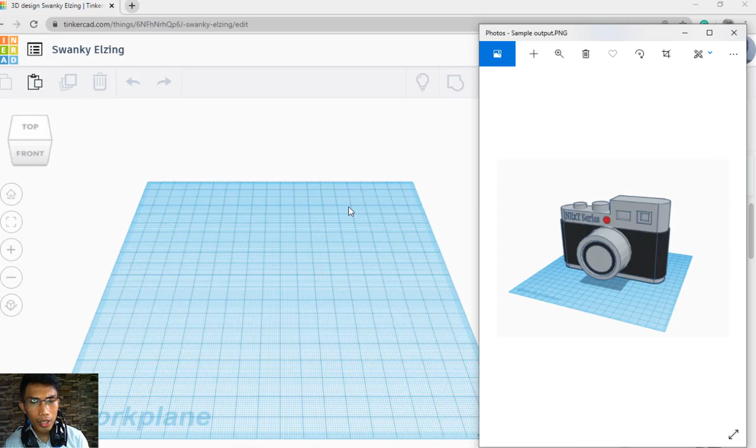I actually made this design yesterday night. This is a camera, a 3D camera, made using the Tinkercad application. So here is the Tinkercad environment, and as you can see, it's a very easy and simple environment.

On the upper left corner of my screen, you can see the file name of your Tinkercad design. We can change that by simply double clicking and retyping our file name. For example, this is our first 3D design, and then you just press enter. Now you can see the file name has changed to first 3D design.

The next thing to do is to familiarize ourselves with the environment of Tinkercad. You can see here that you can duplicate or copy your Tinkercad design. You can paste, duplicate, delete, and redo or undo your designs.

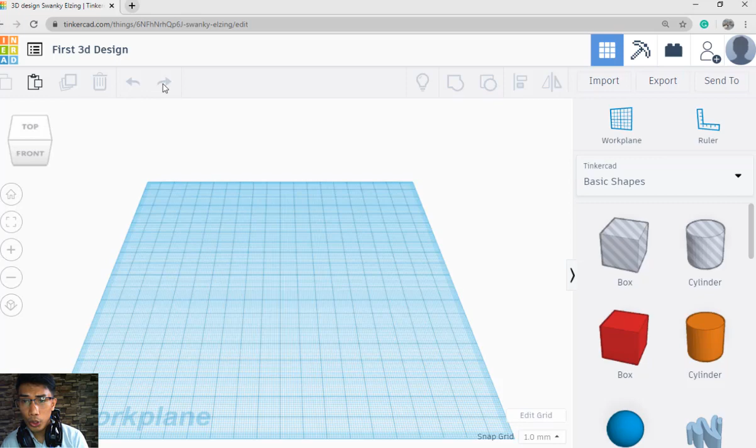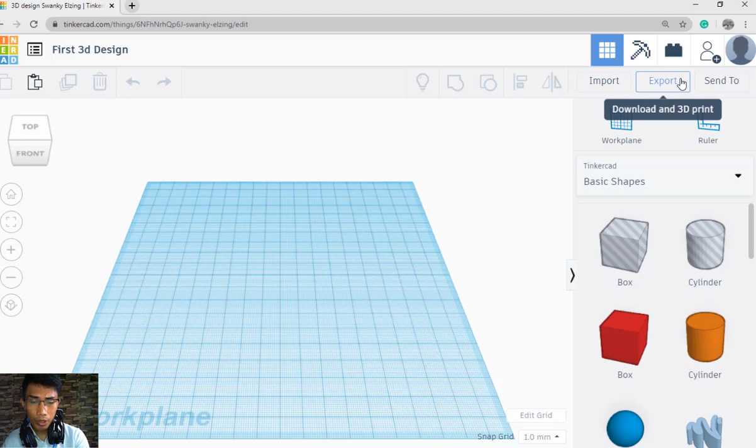Also here are the disabled function icons. You'll see the different functions of these icons once we're doing the actual 3D modeling design. You can also import from your local computer, and export the file you're doing here in Tinkercad, so later you can 3D print it. I'll show you how to export and the different file extension names you can use.

For collaboration, you can add your learners, classmates, or teammates later on, and you can also send your design to other people.

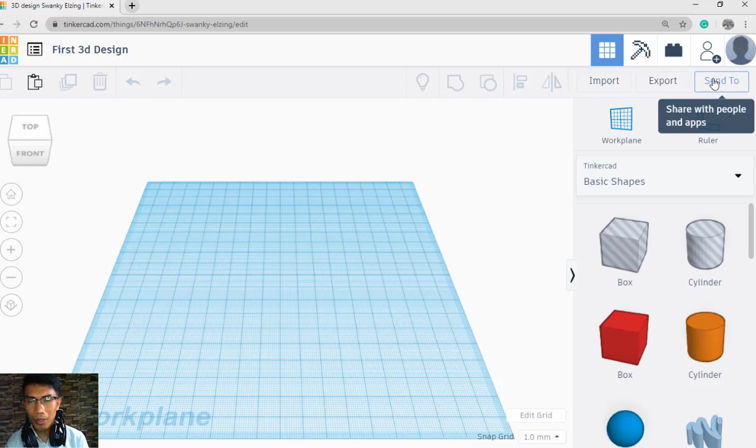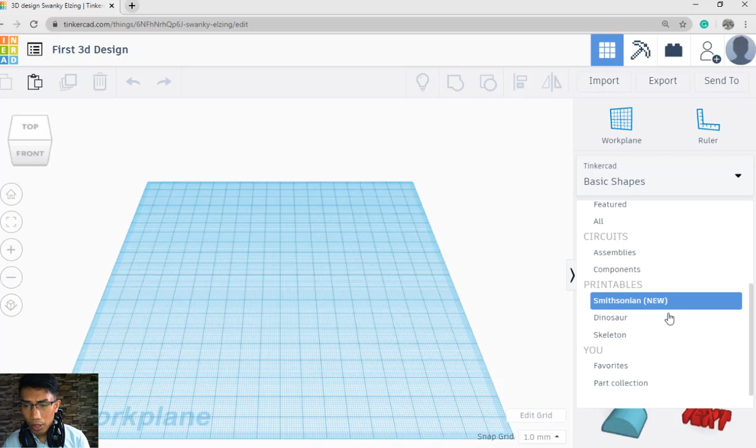Here are the actual shapes available in Tinkercad. These are just the basic shapes. You can choose from different shapes: text and numbers, characters, connectors, helpers, and a lot more. It's up to you to navigate later on, but let's just use the basic shapes available in Tinkercad.

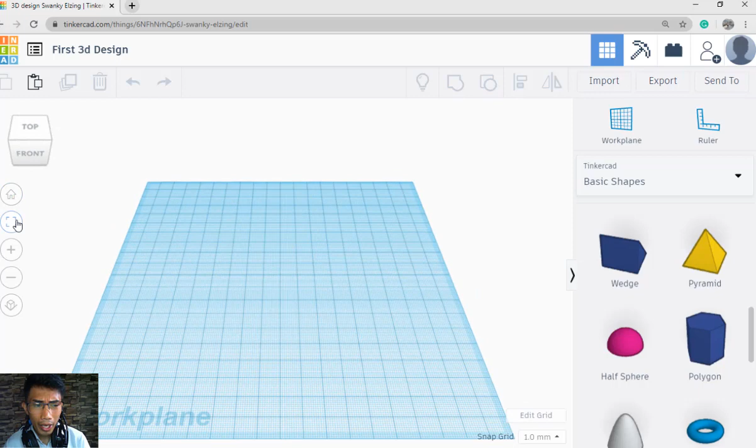On my left screen, we have the navigation icon. I'm holding my right click in my mouse, and you can see my work plane is moving. This is how you navigate your Tinkercad design, using the home, recenter, zoom in and zoom out, and the switch to perspective view options.

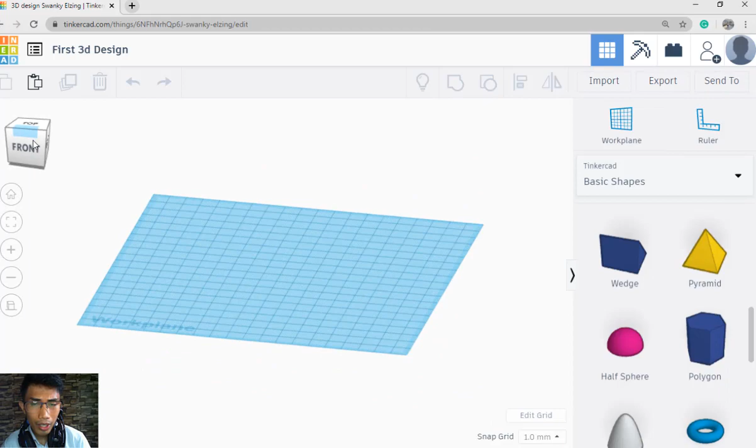Moving on, let's now create a basic 3D model. We're going to create a basic camera, a 3D model of a camera like this digital camera here. You can use this icon to navigate the 3D object, or use the right click of your mouse to navigate. Now I think we're ready to design our 3D camera.

First, let's check our camera. As you can see, it has a shape, I think a square shape, so we need to add a box. You simply select the box, or the 3D object you want, and put it in your work plane, then drop it. So this is our box, and the next thing to do is resize it.

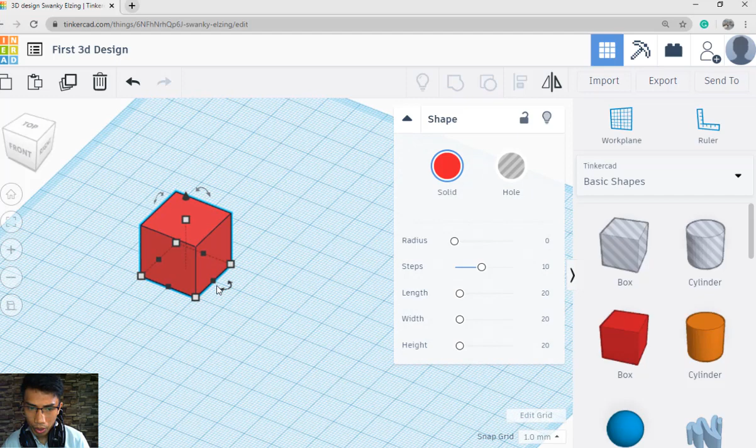We have options on how to resize our 3D design. The manual way is to select the point and then drag, push or pull it, as you can see on my screen. We also have the option to type the exact size — for example, this one is 20, I can change it to 25, and here let's say 75. So you can either manually resize your 3D design, or simply type your desired size.

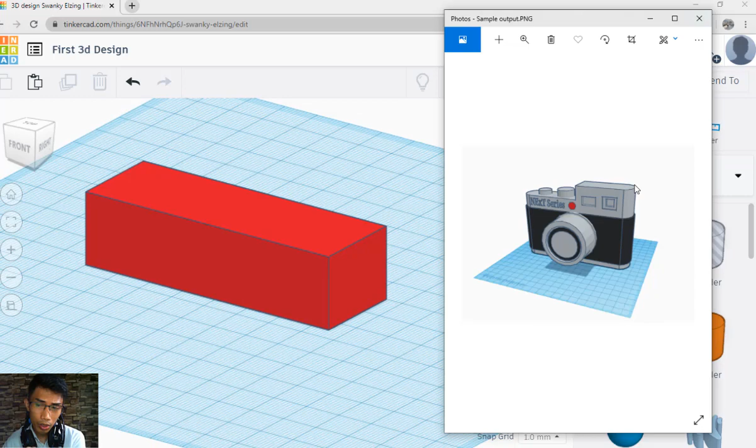Okay, going back to our design, you can see there is an actual radius here, or smooth edge. So let's try to add that. To recenter everything, by the way, you can select the 3D object and use your left click, hold it in your mouse, and then simply move your 3D design. Since there's a radius or smooth edge, maybe we can use the cylinder.

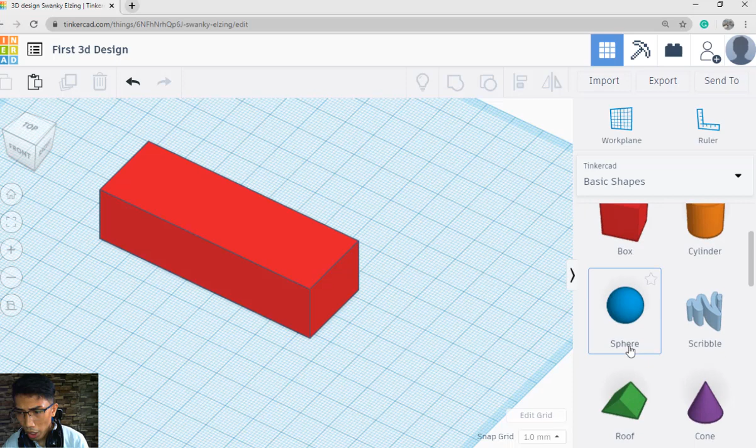This one is the cylinder, and then drop it here. There you go. Let's just make sure to follow the size of our first object, which is the box. So we can manually type it. Okay, I think this is 25. There you go. So I think we can now group the two objects.

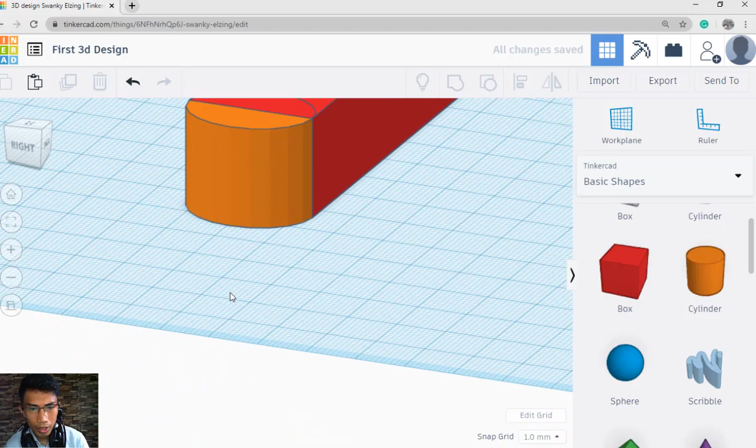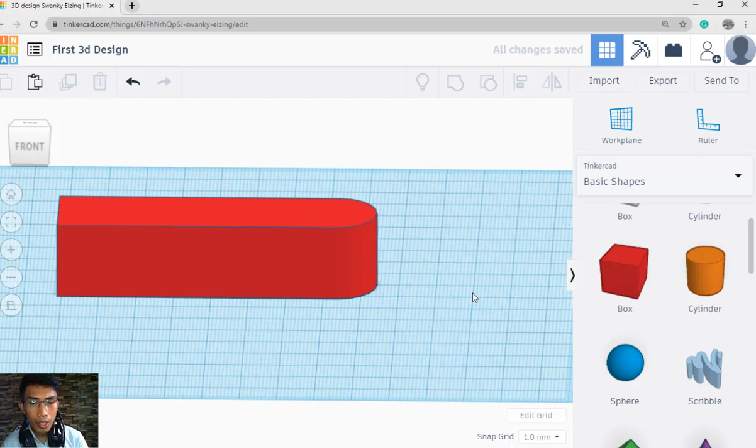On how to do that, you simply select the two objects, and then you can see here in my upper right corner the Control G. You can press Control G in your keyboard, or you simply click this icon for it to be able to group the two objects. Now, since we're able to group it, you can see that the color will change and it will become red.

Okay, so Control Z for the meantime, since we need to duplicate this cylinder, making sure that the other edge or the other part of our cube or box is similar to the right part of our box. So let's just copy.

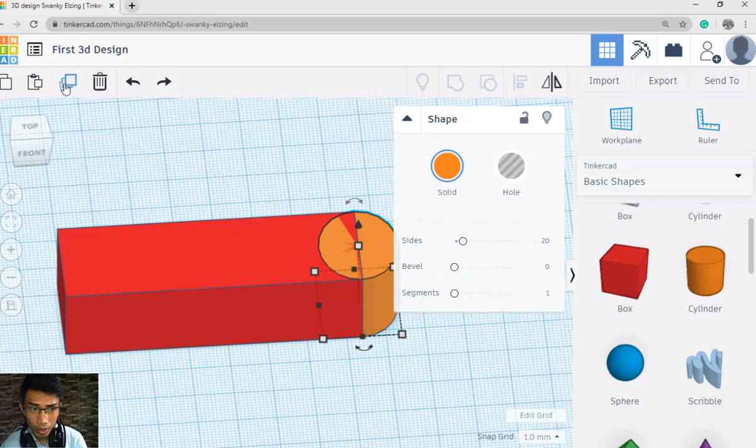Select the 3D object. You can simply duplicate it or copy paste. This one is duplicate, so you can duplicate and then just move the cylinder here. There you go, you can see now, and make sure it's proportional. All right, I think this is okay, looking good.

Now we can select the whole thing, the three 3D objects, and we can simply press Ctrl G in our keyboard to group these three 3D objects. Now you can see that I have a smooth edge in my box. So let's resize our box.

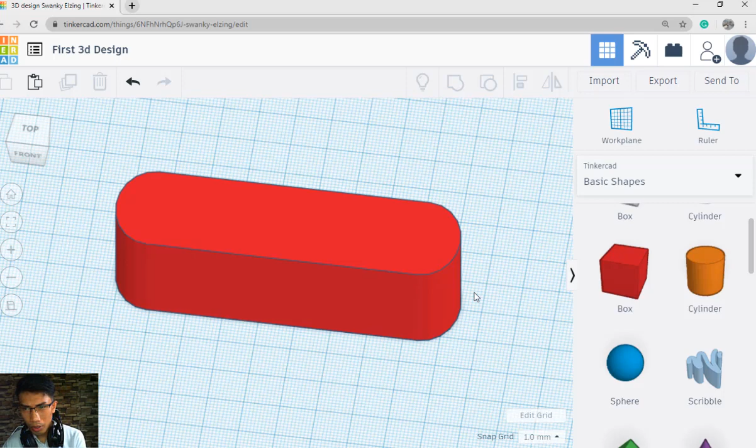Select the box, and then again you can manually resize, or you can just type the size. Maybe let's say it's 30. Okay, so that's how you combine or group 3D objects, and how you can resize using manual methods and using the exact measurement, if you want, then you simply type the value.

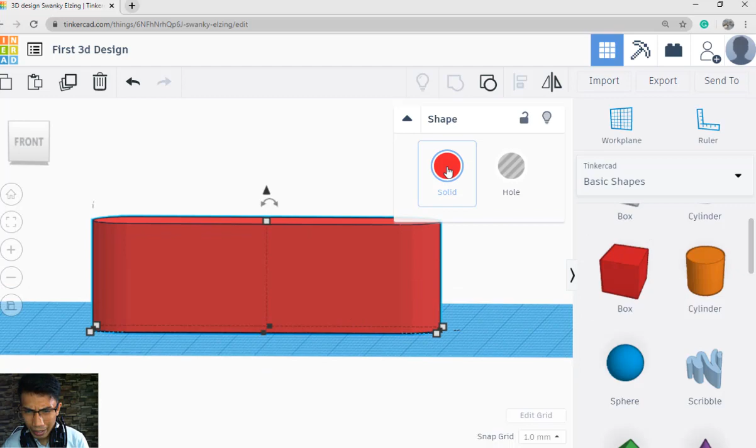Okay, going back to our camera, you can see here there's a black color here. Then let's just follow. Maybe we can duplicate this thing. Let's make sure first we need to change the color, so make it black for now. Yeah, it's black. Yeah, and then let's duplicate this 3D design.

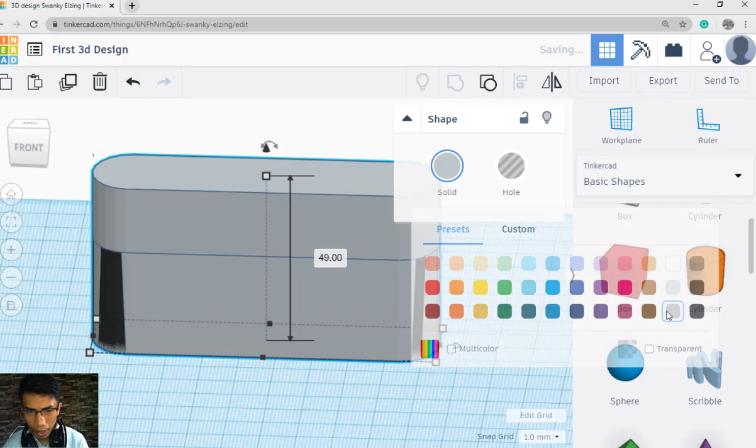So again, to duplicate, you simply press in your keyboard Control D, or use this icon, duplicate, and then resize. You can see now it's resizing, and let's change the color and make it a lighter one. Okay, and then of course you can see that it covered our first 3D object, which is the black.

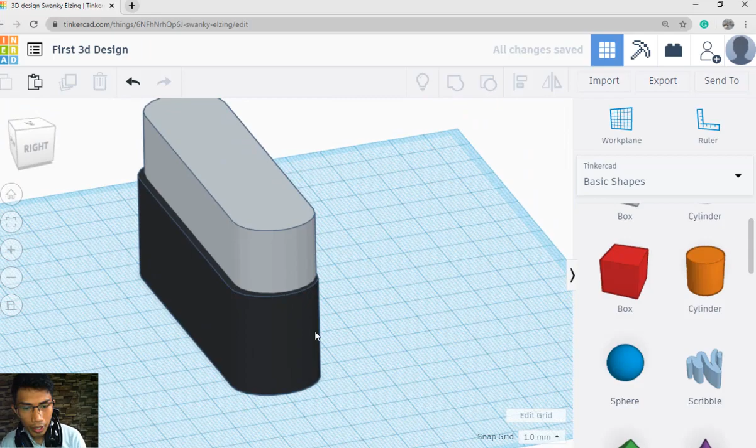So maybe we can resize this one. Select the object, and then maybe we can type 23, and then this one, maybe it's 23 also. There you go. Now you can see the design.

So we need to recenter everything. Okay, let's just check our 3D design here. There, so there's a space at the bottom. So let's move this black 3D design here just a little bit. Now I think it's okay. And then let's recenter everything, making sure that it's proportional.

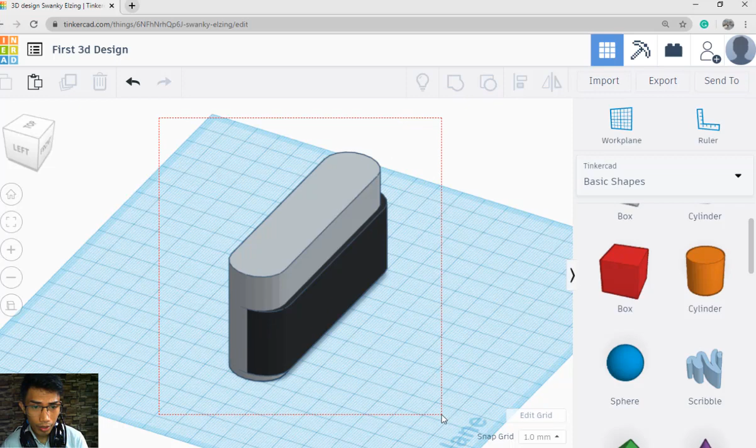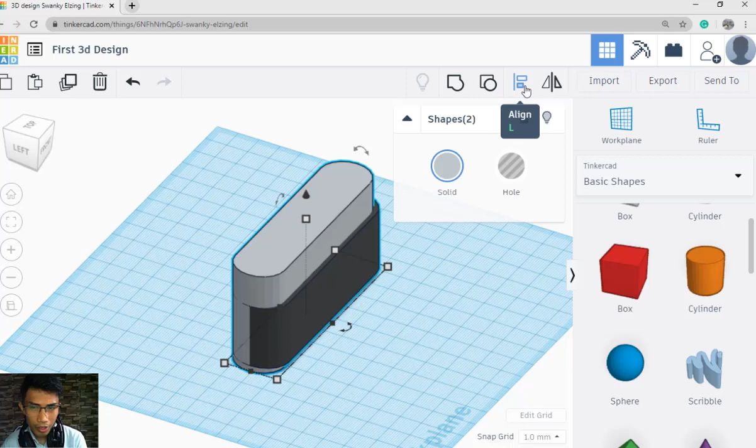Then we can select everything, box select. Okay, just like that. Or in individual selection, you simply click the first object and then hold your shift key in your keyboard and then select the other object. So once selected, you can now realign the 3D object. To do that, you can press in your keyboard the letter L, or this icon. Simply select the icon, press it, and then you can see there are several points here.

Okay, so I'm going to show you how to perfectly rearrange and then recenter everything. So I'm going to choose this center. There you go. You can see it's actually centered. And we have also here another one there. So it's actually recentered now.

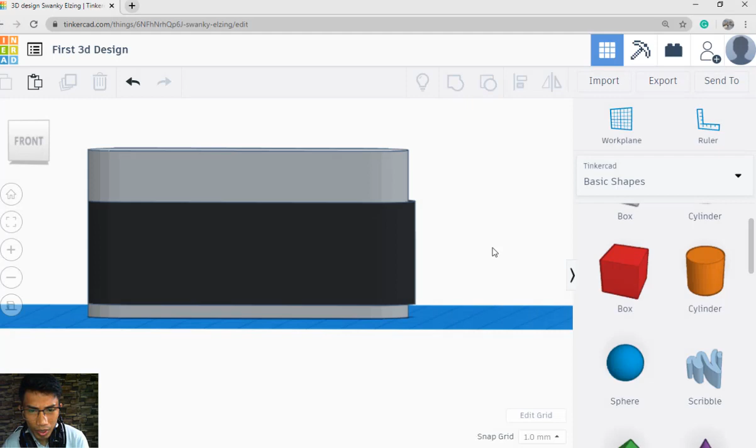Okay, and we can move now the 3D model. We can move it just a little bit down here. There you go. Let's check our sample here. Yes, so I think it's okay. And the next part is going back here. You can see, let's just resize this higher. There you go.

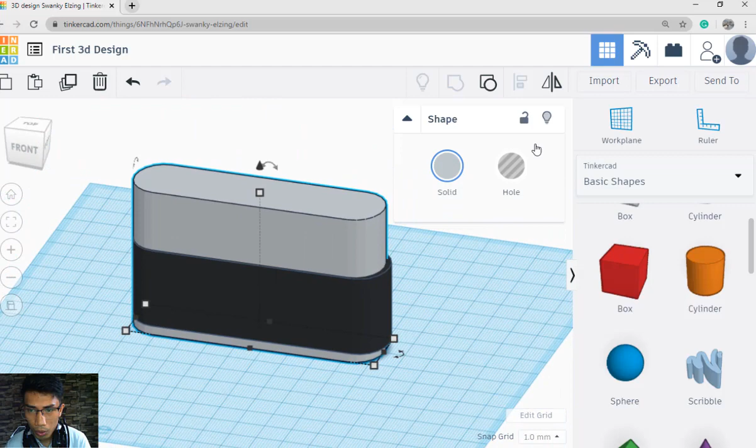I think, yeah, this is 57. And you can see here, guys, there's a cut in here. Okay, so let's just cut. So to do that, we need to add another 3D object, which is the box.

Resize it, and then we can manually resize it. And then let's move our 3D object at the top of our first 3D design. Moving it. Yeah, so you can see, let's move it. There you go. You can actually use your keyboard to move your 3D objects.

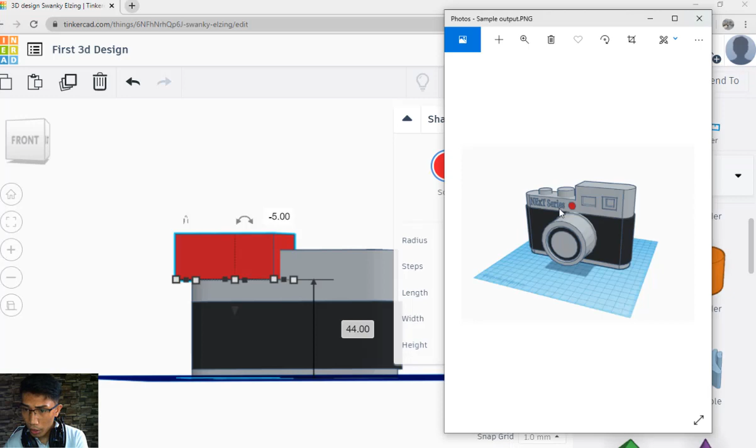Just making sure it's proportional. You can move it, lower bit. Let's check our shape here, our sample design. I think it's at the center. Okay, I think it's, yeah. So I think this is okay already. And now make sure that everything will overlap the first 3D design.

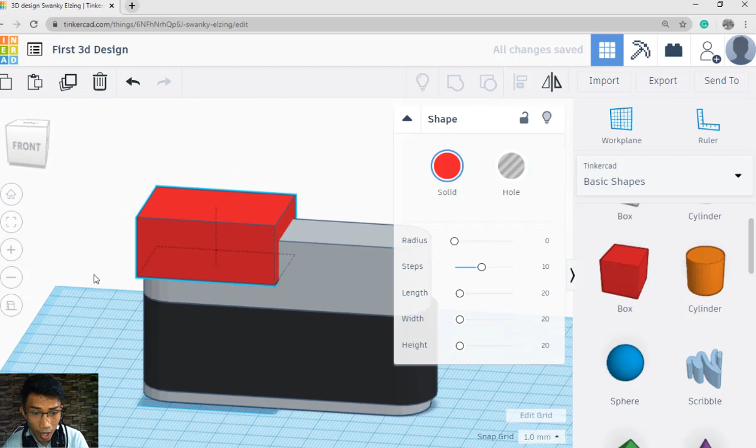There you go. And to cut the object, we need to make this 3D object a hole or transparent. So you select the 3D object and then press hole here, this one. And then you can see it's already transparent here.

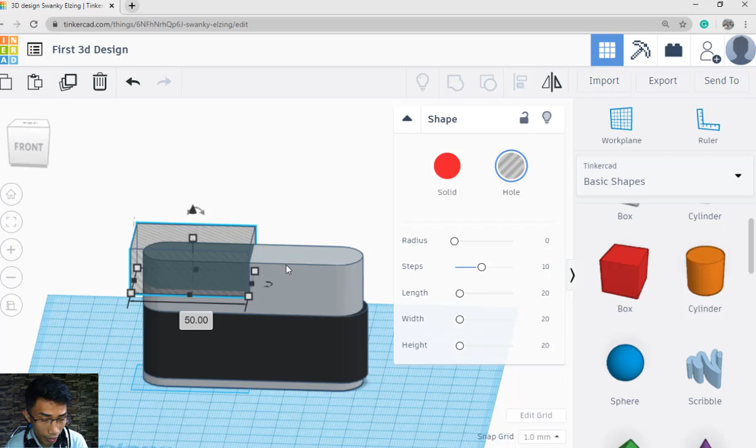Once done, you can now group the two objects. Again, select the first object, hold your shift key, and then select the next object. And then after that, we need to group. You simply press Ctrl G, or you can select the icon here. And then you can see now it's already the same with our sample camera 3D design.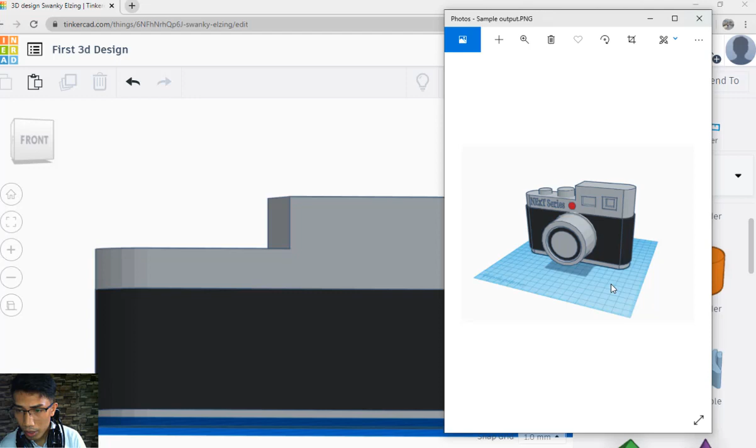Okay, so let's check our sample design here. Yeah, so it's already the same. There you go. And you can see there are two cylinders. The one is smaller, okay, so let's try to do that also.

So let's add a cylinder here. Okay, yep, so cylinder, and resize the cylinder. Okay, maybe this is like 12 by 12, this is the smaller one. And then let's make sure to recenter this. Okay, and then lower. Okay, so resized. There you go.

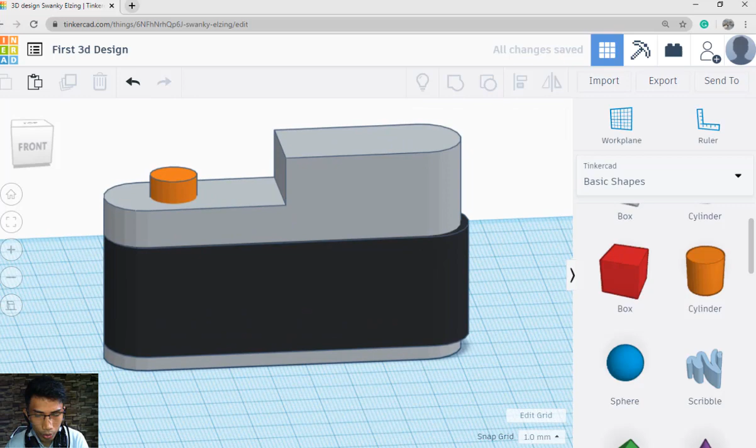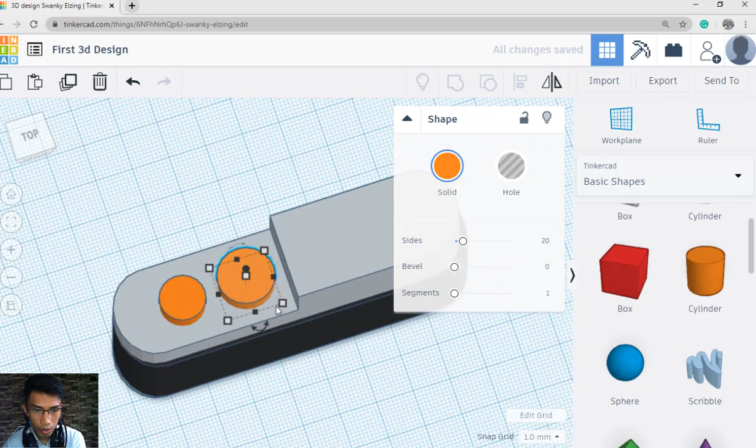We'll change the color later on. So going back to our camera sample, it's smaller, and then another cylinder here, quite bigger. So we can just duplicate the cylinder here. Okay, and then resize, so duplicate and then moved. I'm using my arrow key and then resized. Maybe this is 15 by 15. There you go. And then let's use our keyboard arrow keys.

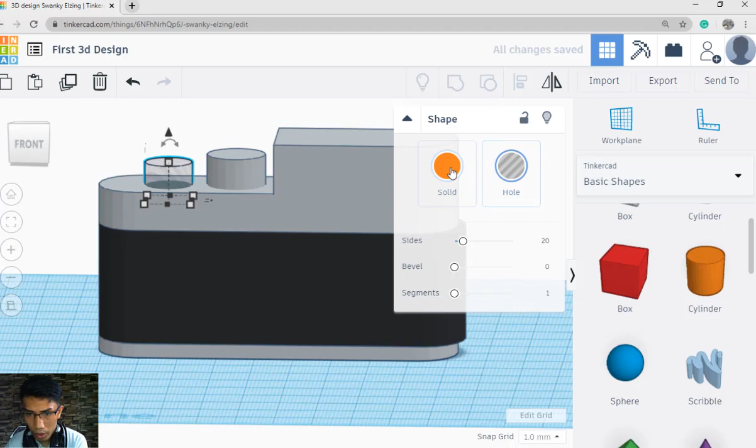There you go, so yeah, let's check. Yeah, I think it's the same already. Just a little bit higher here. There, and of course let's change the color. Select the 3D object and then change the color. Also this one, sorry, there you go. So I think we have the first part of the body of our 3D camera here.

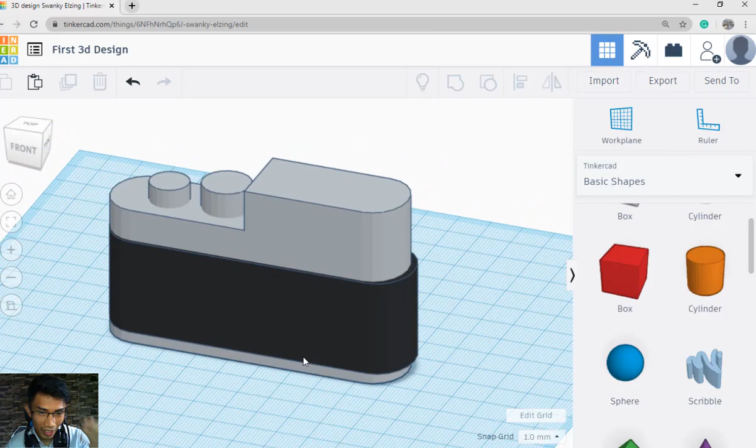And the next thing to do is, of course, we have the red thing here. Okay, that's the signal that the camera is recording, whatever. Yeah, so let's try to add the red thing there. So another cylinder, just simply drag and drop, resized. Maybe that is 7 by 7. Yep, and then resize this one, manually resize it.

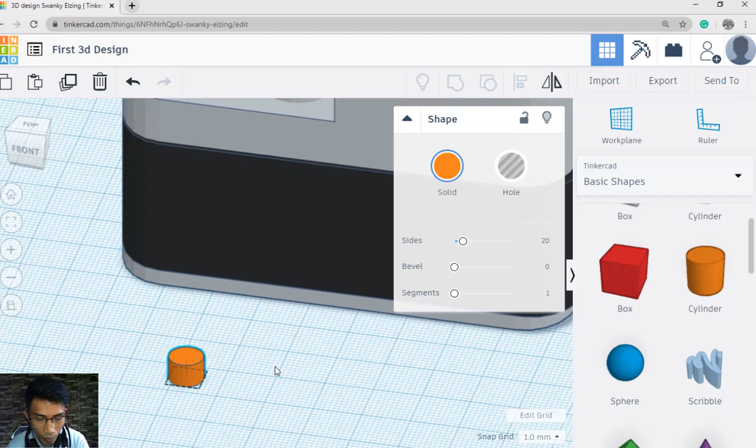And now let's try to rotate. We need to rotate the 3D object. You can see here, okay, so we can rotate it manually, or we can simply type the value. I think this is 90 degrees, so you simply select and then type 90 degrees. There you go. So change the color and make it red.

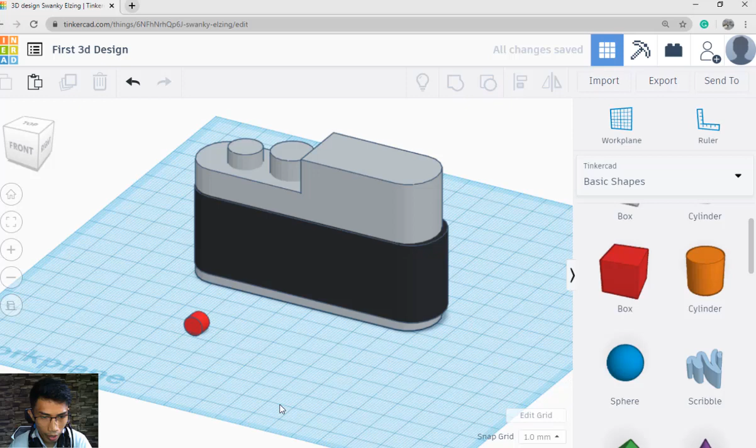Okay, yep, so there, and then let's try to move it, making sure that it's at the center of our 3D model. Okay, and then moved a little bit lower. Okay, there you go. Yeah, I think it's pretty much the same already. Yeah, I think we need to resize it also. So let's just resize, make it like 5. Also this thing here, it should be 5. There, so now it's proportion.

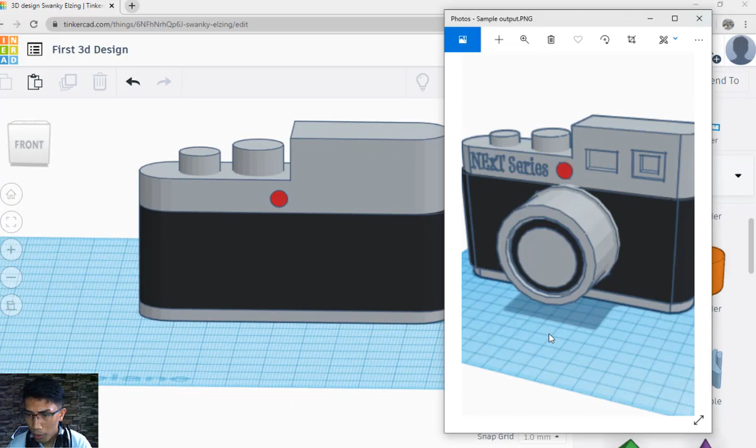Okay, the next thing to do is we have here the cylinder also here. So we can add another cylinder. Simply select cylinder here and drop, and then resize, manually resize, or you can simply type the value. So maybe that is like around 50 by 50. Yep, I think it's 50 by 50. Yeah, sure, we can just go back to the size later on.

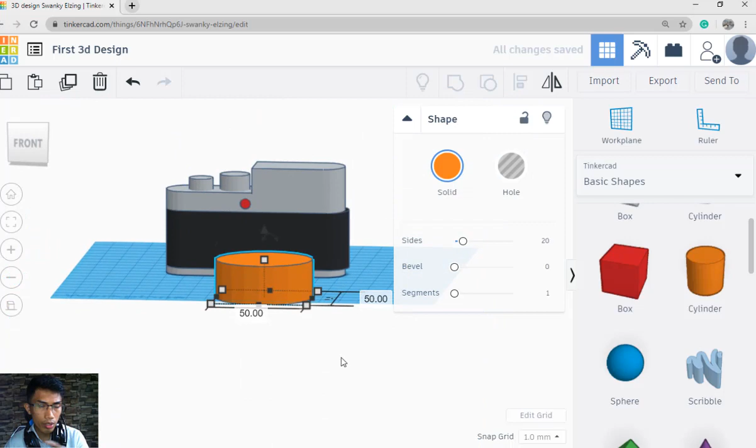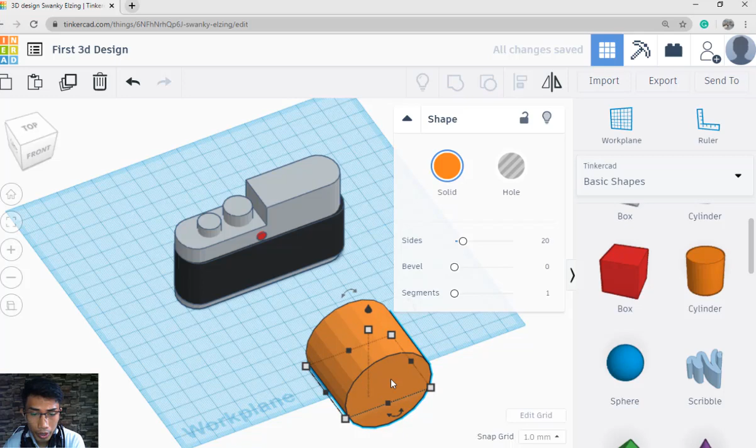Okay, and then of course let's rotate. Here we need to select this one and then type 90 degrees. There you go. And of course, resize one more thing here. Okay, all right, I think this is quite good. And of course, let's move this using our keyboard key. Okay, arrow key, and then there, and then recenter. There, I think it's quite big, so maybe we can resize this. Maybe we can make it like around 35 by 35.

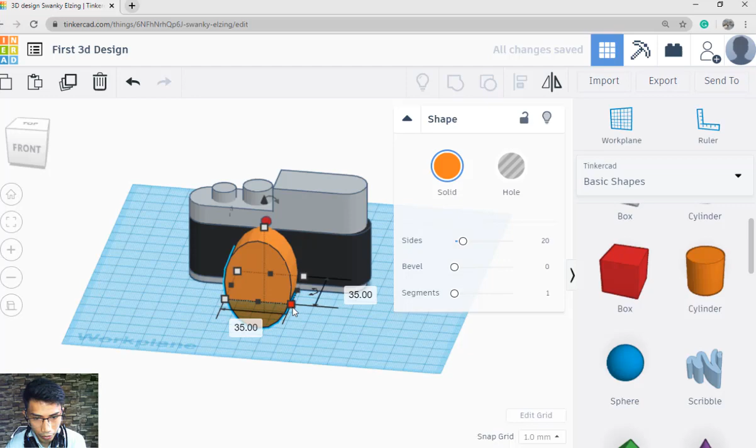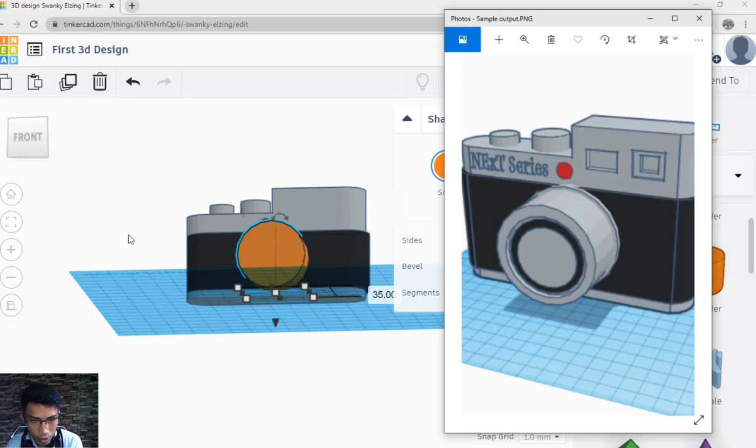35 by 35, the height should be 35 also. So let's move our cylinder here. Yep, okay, a little bit more, higher. There, so let's check our sample. I think it's perfect already. So let's just maybe change the color of this.

Okay, there you go, so we have this lens already here. Going back to our 3D design, you can see there's a black cylinder around here, a black circle here, so let's try to create that one. But you can see also here there's a bigger shape, a bigger cylinder here, so maybe we can just duplicate this thing.

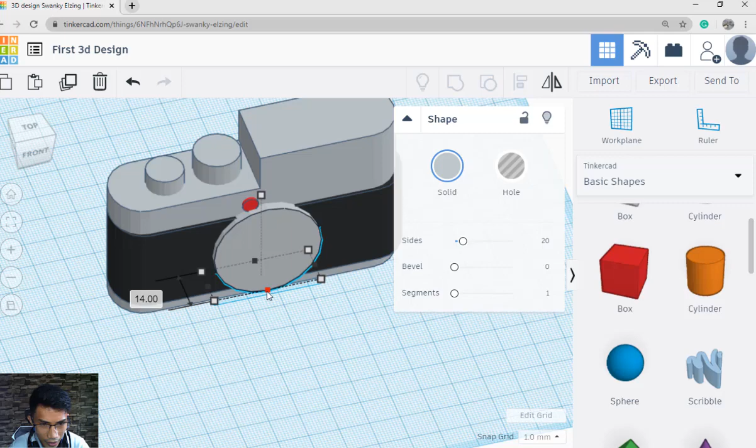Okay, resized, there you go, and duplicate, yep, and then resized. And then let's change the measurement, maybe we can make this 33. Of course, let's make the height 33 also, okay, making sure this is proportion, this one should be 33 also. There, so let's recenter this.

Okay, we can manually adjust it, or you can simply use the alignment tool later on. Okay, so I think this is okay already. And the next part is we have the black circle here. So again, one more, okay, duplicate, and then let's move this thing here, resized there, and then we can...

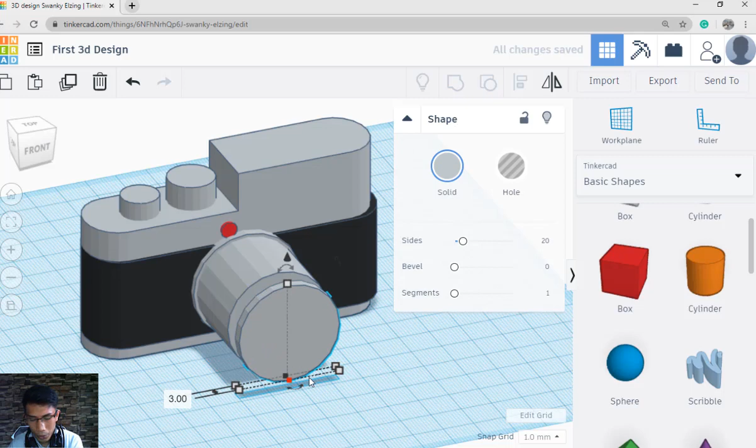I think there is a bit of a hole here, so it has a hole there. So yeah, we can resize this, and then let's say it's 30. Also this one should be 30. Yep, and then recenter, and then moved.

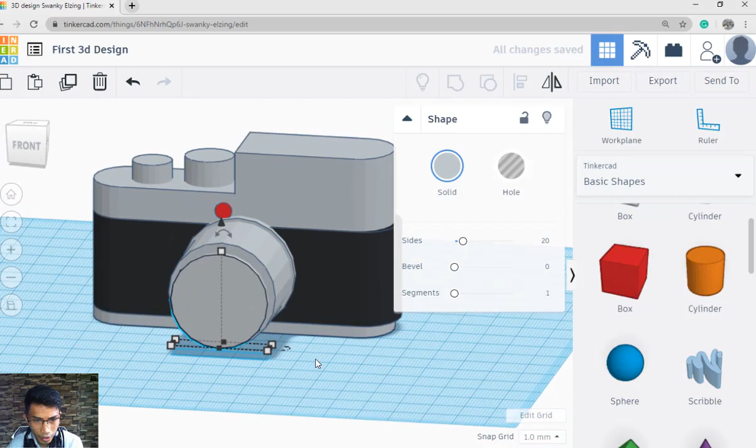Alright, and move it higher. Yeah, so I think we can adjust the size also, maybe this is 25 here. Okay, then move, there you go, and move also.

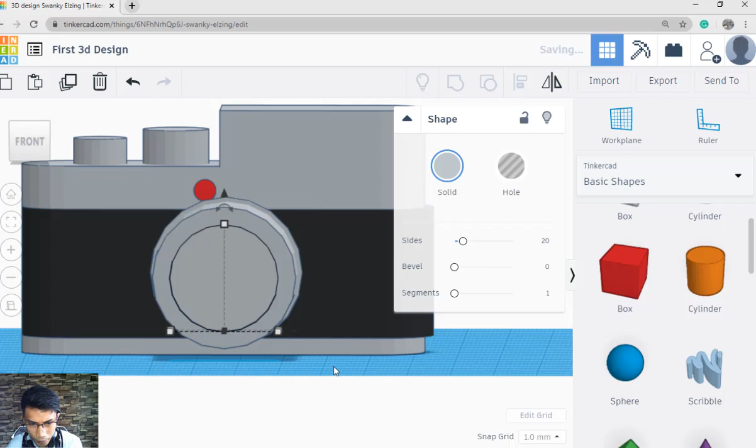There, if you are okay with the measurement already, then we can make this transparent, and then let's combine, or let's group this one to our 3D object here, and then press Ctrl G on your keyboard, or simply click this icon, and you can see now. Okay, yeah, so let's check our sample 3D design here.

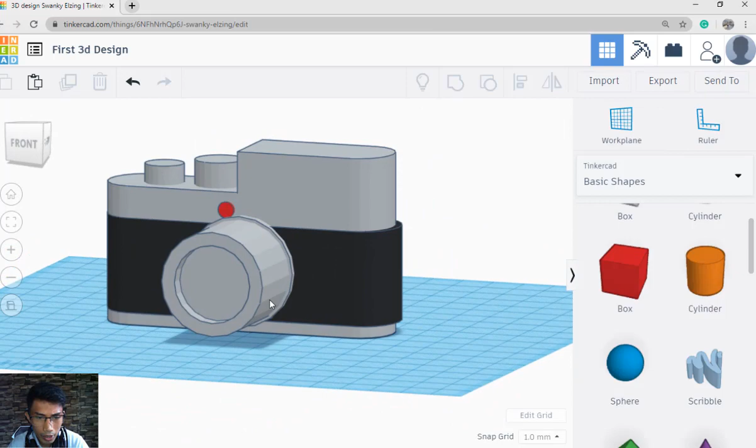Yes, and of course we just simply duplicate this thing again, and then resize, making sure that it should be in black color, you can see here on our screen. So let's duplicate this thing. You click this duplicate, and let's move our 3D object here, resized.

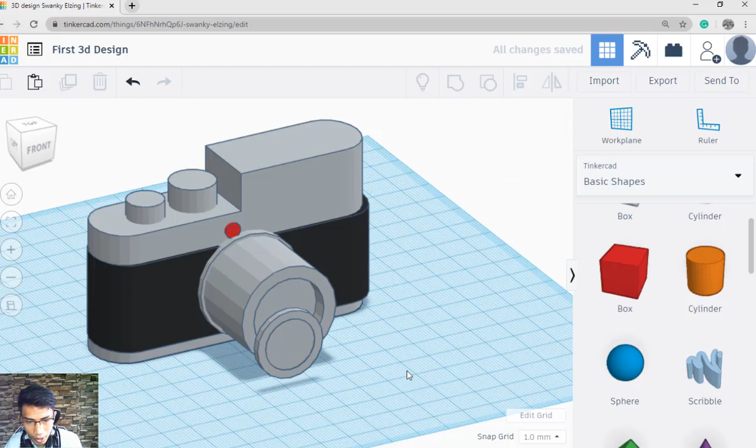And of course, we need to resize this thing, maybe this is 23 by 23, let's try 20. Yes, and let's recenter this. Okay, and then move backwards, and then a little bit lower, I think. Yeah, so there you go.

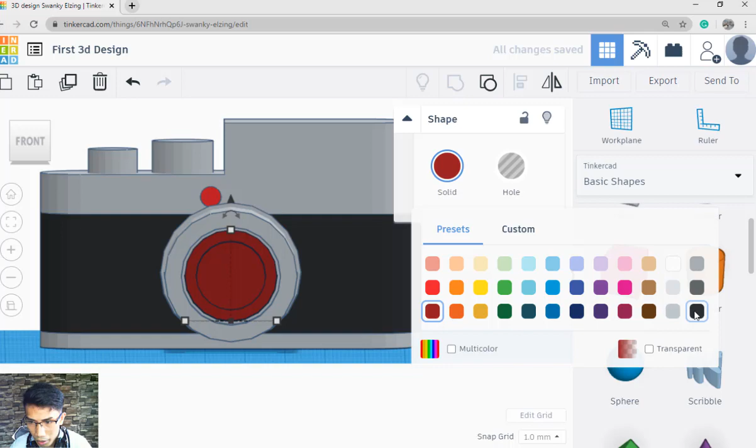And then let's change the color of this one, make it, no, not red, this one is black, okay. So we have here our black object. Okay, so yeah, so that's it.

And the last part is there's the same color at the center. So again, let's simply duplicate this thing. Duplicate and move the object, or yeah, move the object and resized. This is, let's try 20 by 20, and then change the color, and then again recenter, higher, and then moved.

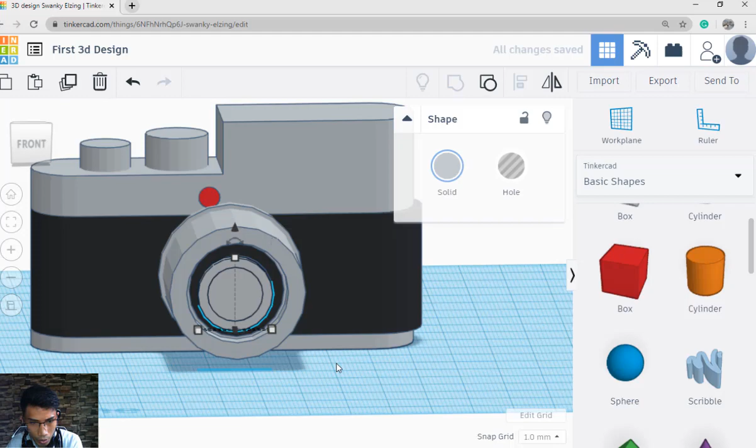Okay, there you go, so I think it's not, yeah, maybe we can change this, make it 18, this one is 18 also. There you go, and you can now recenter everything. There you go, yep, so let's see our design here.

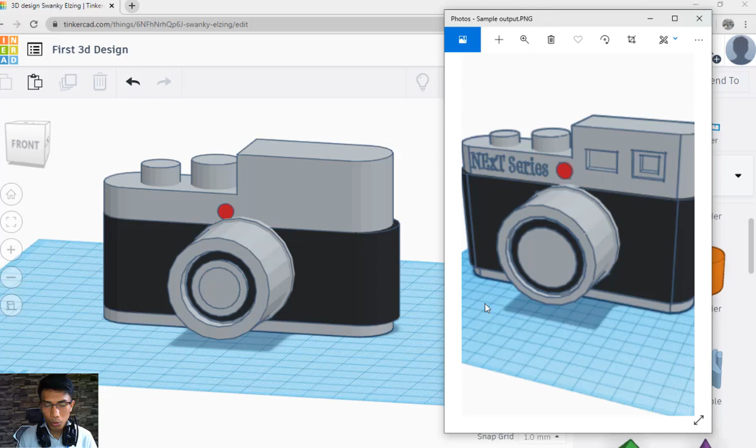Yeah, we can move this one a little bit here. So yeah, so it's now the same. There's just a little more like a circle shape at the center, but it's okay. Now you can see in my screen there's a shape in here, okay, rectangular shape, okay, so let's try to add those shapes.

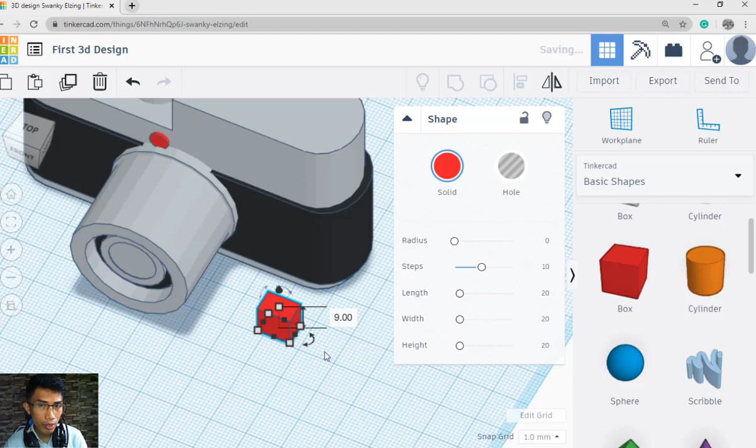So again, another box here, resize the box. Yeah, so you can manually resize it, okay, or you can simply type the measurement and then moved. You can use your keyboard, okay, I'm using my keyboard right now. There, let's check our sample design.

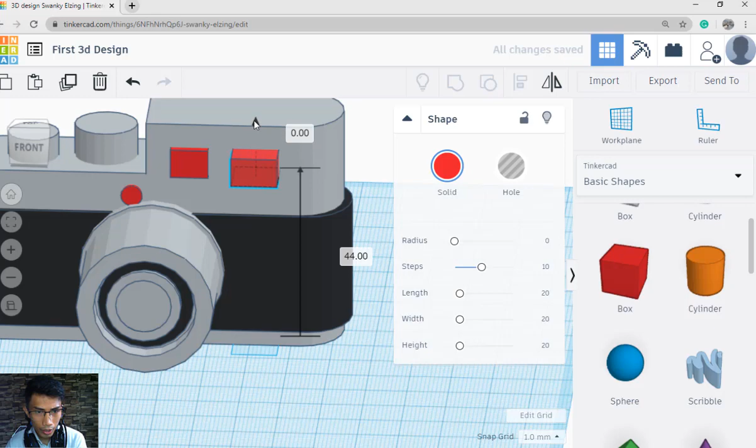Yep, so maybe smaller. Okay, and another, let's duplicate this thing and use your keyboard and then resize, this one is a bit bigger. There you go, and now let's make this box transparent, and then choose hole, and of course select the two 3D objects and then grouped.

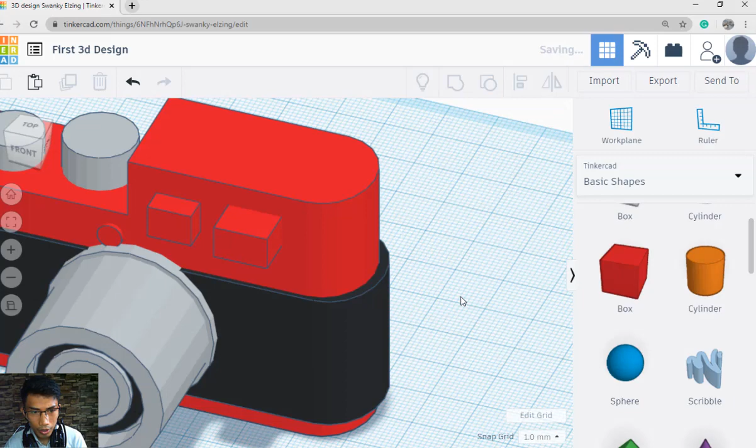There, so yeah, so I think it's Command Z. Let's move this and then select everything. Then, sorry, let's make sure this is transparent and grouped. There you go, and the last part, see here. Okay, so I think we need to, yeah, make this transparent also, select the two objects and then group.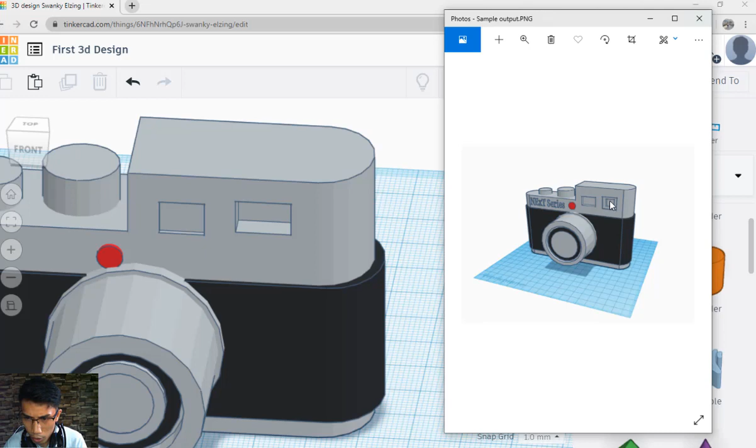There you go. And we missed something here - there is a smaller box inside the speaker box. So let's Ctrl Z first, and make sure to create the smaller box before the bigger box.

Then duplicate this thing. Okay, now we can duplicate this. Select the duplicate and then resize. There you go.

Resize, bigger. Yes, and recenter, so a little bit lower. There you go. And now we can make this thing transparent.

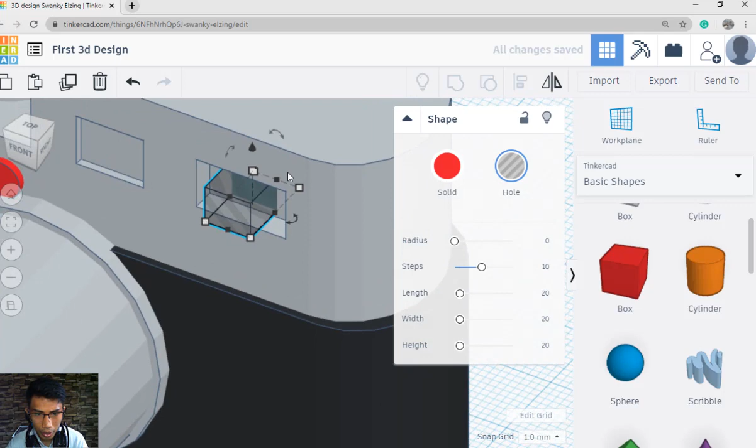Select the two objects and then group. There you go. And then the last one here, select the object, hold your shift key, select the camera, and then group. So you can see now it's quite similar to our sample design here.

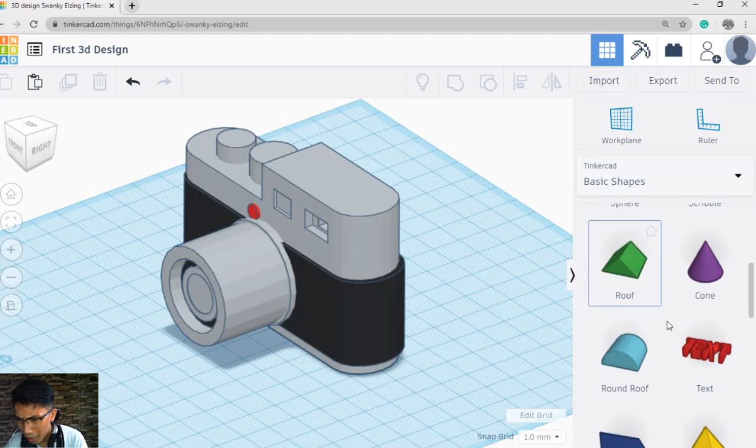So all we need to add is the text, the NExT Series text. So let's try to add the text. Look for the text here and then rename it as NExT Series.

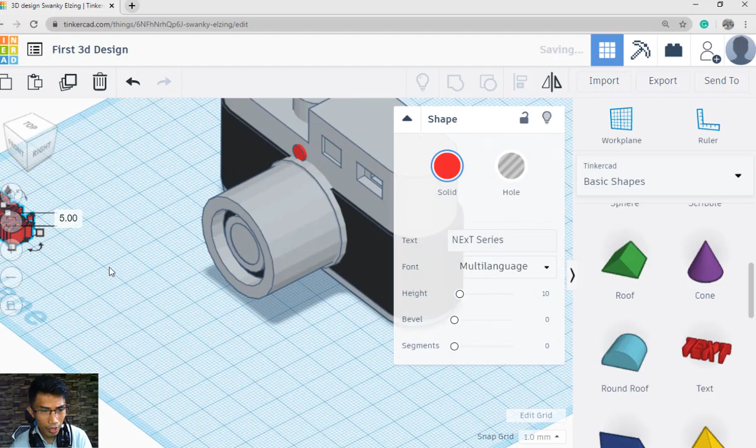Let's resize this text - this is manually resize. And of course we need to rotate 90 degrees again. And we need to make sure that this one is located just at the right corner of our camera.

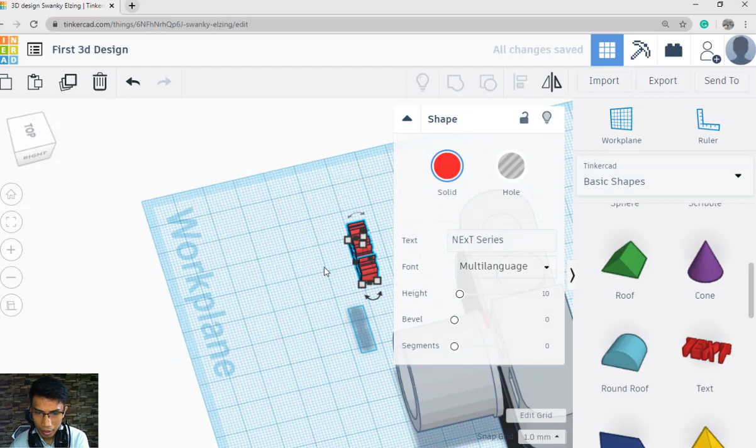A little bit lower here, and then let's change the size. Okay, there. So let's check our sample design here.

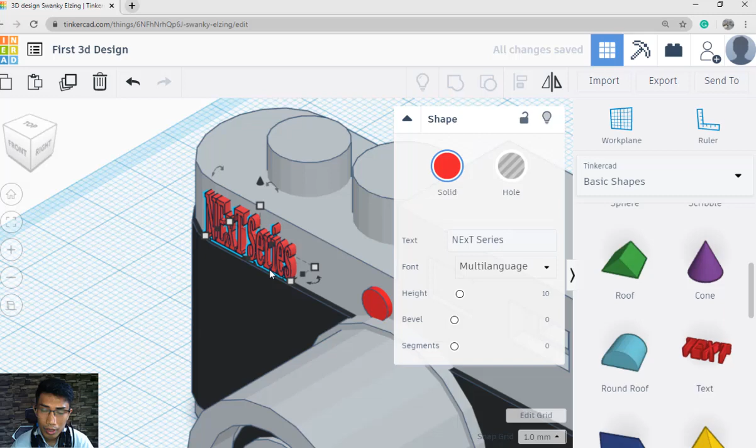So then to finalize things, we need to make this text transparent also. Select the object, make it transparent, then select the camera, and press Ctrl G on your keyboard, or simply click this icon here. And you can see now our design - it's already embedded in our camera.

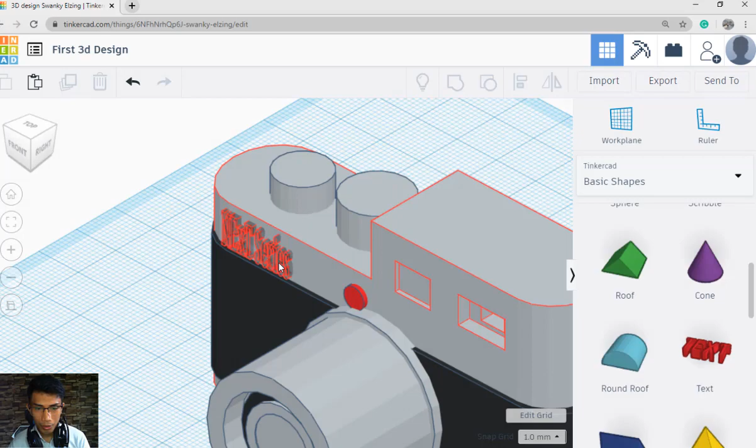So pretty much that's our 3D design. So grouped, there you go. So this is now our final design, as you can see in our sample 3D camera here.

So we were able to replicate the camera. Now you can change the colors if you want - maybe you can make this yellow, it's up to you. How about this red? It's up to you, so it's your choice if you want to choose other colors later on. But for the meantime, this is our final output.

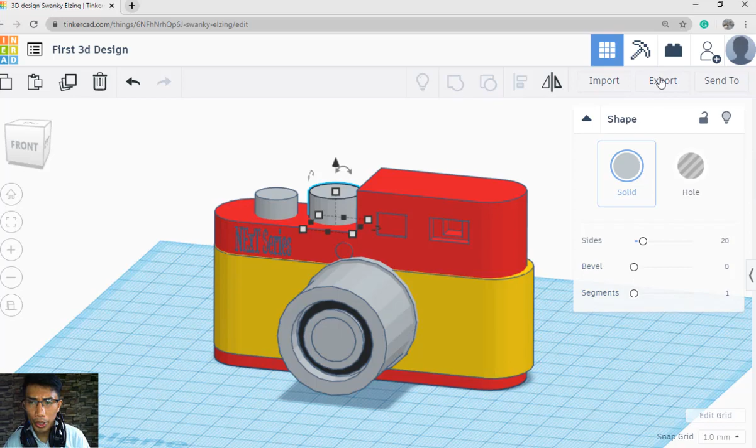Now I'm going to show you how we can export this product so that we can 3D print it later on. Let's try to export the product - simply click export here, and you can see the different extension names: OBJ, STL, and GLTF. I'm choosing STL. Once you click STL, it will automatically be downloaded to your computer.

So you can see here in my computer, it's already downloaded. Let's try to open our 3D design - simply click it and it's generating. There you go. So this is our final output, wherein you can now 3D print this design. If you have your 3D printer with you, you can 3D print this.

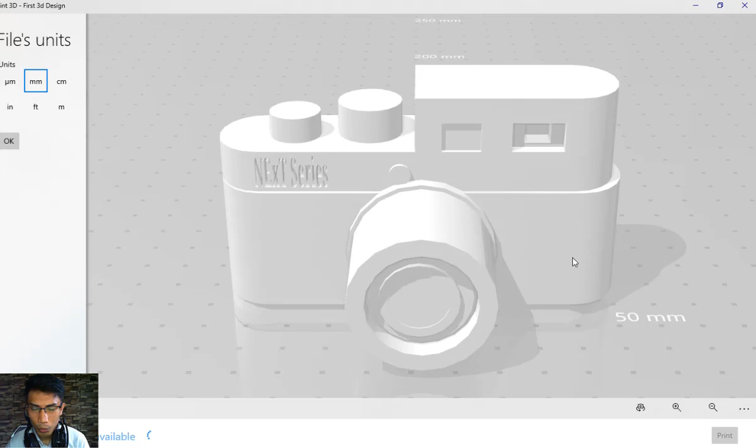Okay, so you can also see here different units of measurement, so it's up to you if you want to change the unit of measurement.

Okay, so that is for today, that's all for my topic. I hope you learned something on how we can use 3D design using Tinkercad, and how we can integrate 3D modeling to support the products of our learners, of our students later on, to lessen the cost of the project.

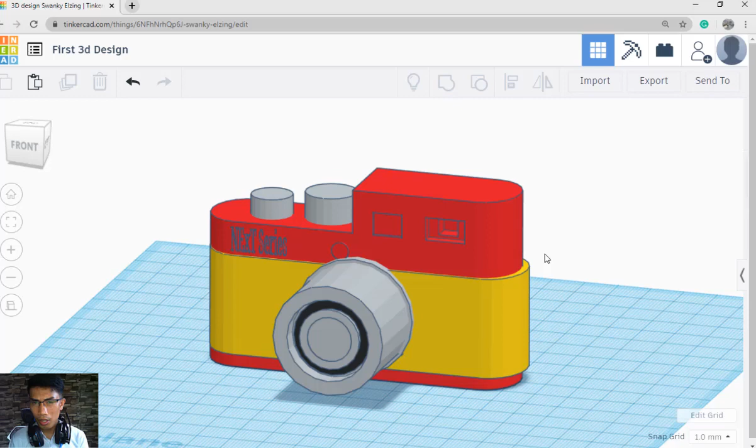Since we are doing online distance learning, I think it's much prettier if we use different online simulation tools such as Tinkercad in giving our students projects. If you want to give our students a project later on, then we can use Tinkercad if it's a 3D design. So it's up to you on how you can integrate your different subjects using Tinkercad also.